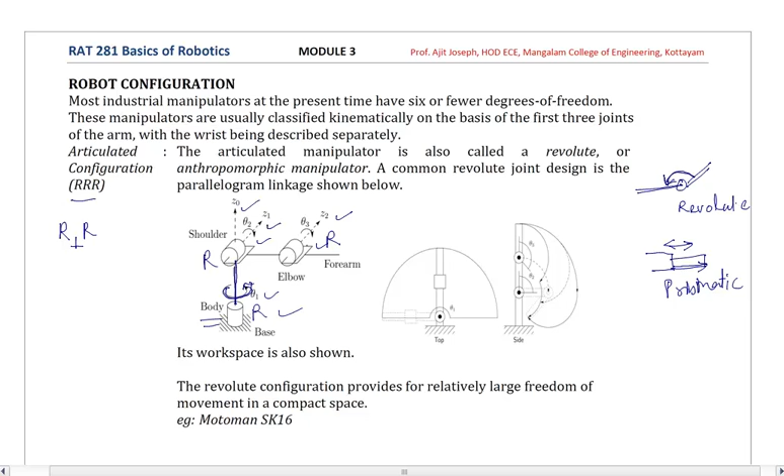And the third, if you look, the third revolute joint - let me expand this so you are able to see it much more clearly - is basically having its axis as Z2.

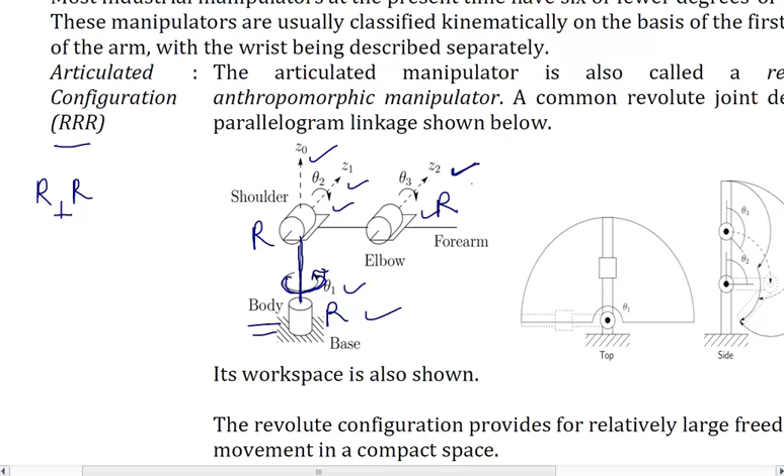Here the movement of the shaft will be in this direction for this revolute joint. The second will make it move in this direction. When this is rotating like this, the whole motor that we see here will rotate in this direction, and then this link is basically going to move up or down angularly based on the movement of this revolute joint. So that is what this diagram basically shows.

The third revolute joint is again another motor whose axis is in this direction. You can see that Z1 and Z2, the two axes of the motor, are parallel to each other. That's why it is written as R is parallel to the third R. So R perpendicular, R parallel R, or it is known as the RRR configuration.

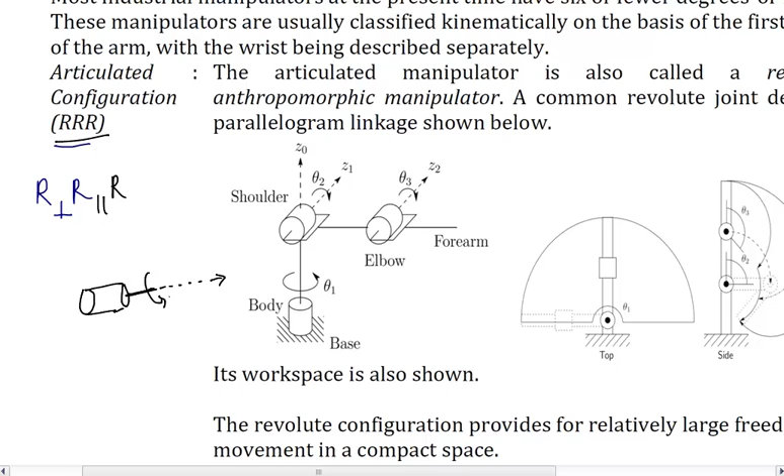So you can imagine the movement. Whenever we are having a motor like this, the shaft of the motor which rotates is basically the axis about which the rotation is taking place.

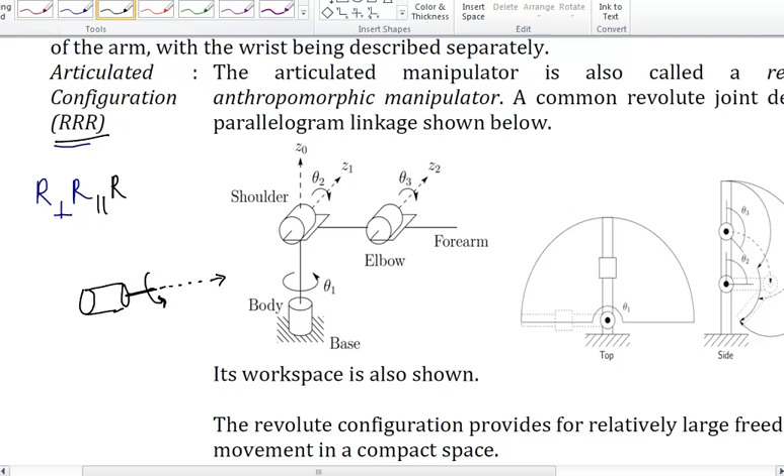I will put a video for the RRR configuration for you to understand how it looks like in real life. Anyway, the work envelope, or the area with which it can move, can be understood by looking at the top and side view. If I look from the top direction, what do I see? I basically see this image - this is the top one, and its movement is there, and we are having the work envelope around it.

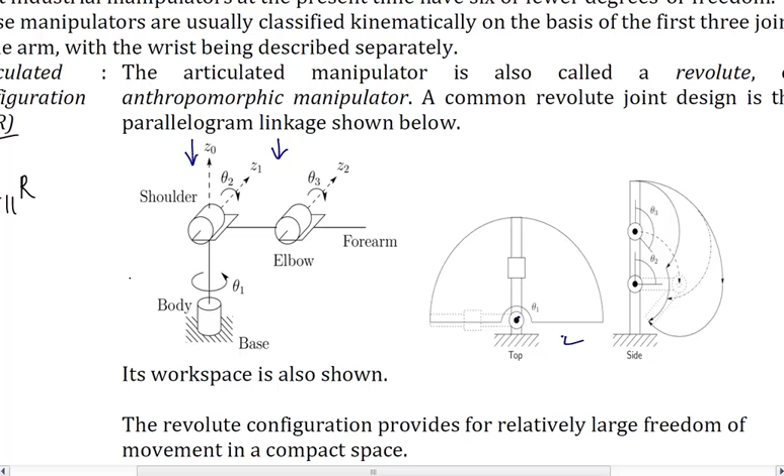So this is the articulated one, or it is also called the anthropomorphic manipulator.

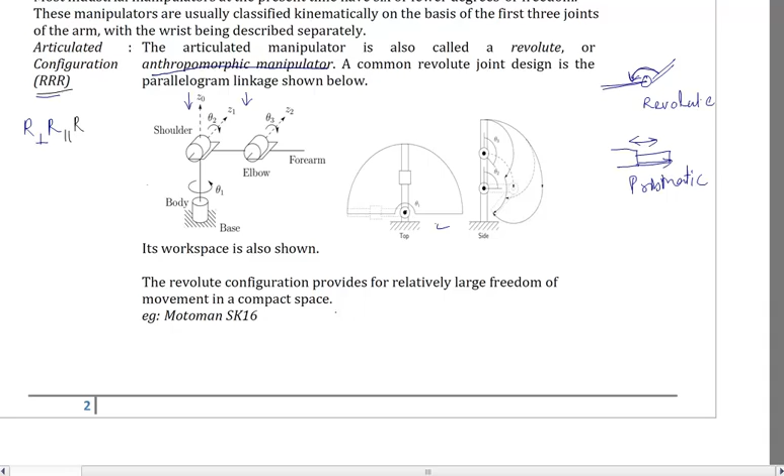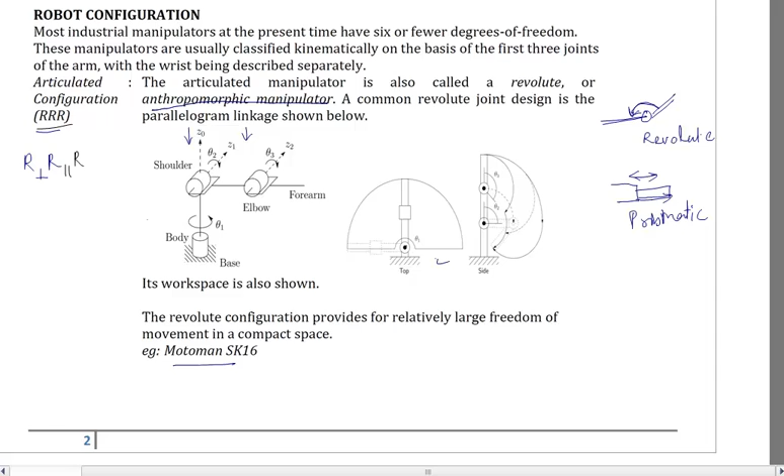Okay, and it's actually the revolute configuration for a large degree of freedom it provides. One example is the Motoman SK16, an old robotic manipulator. So this is the first articulated configuration.

The second one is a spherical configuration in which again we have three joints. The first joint is revolute, the second joint is also revolute, the third one is a prismatic joint.

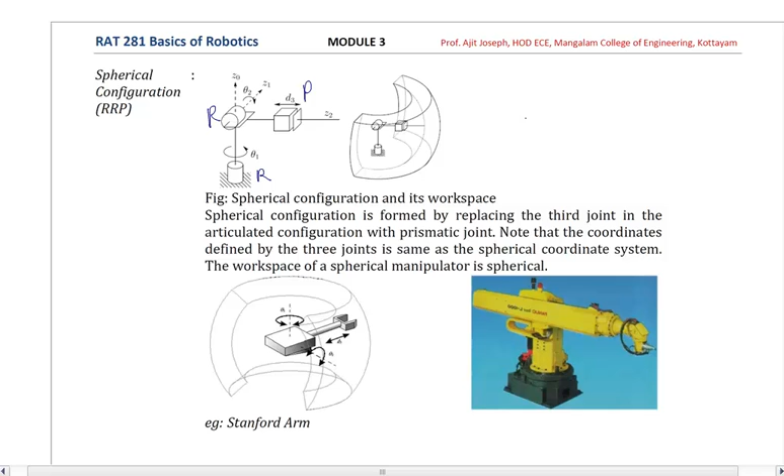See how we draw the prismatic joint. Let me expand it. The prismatic joint is drawn like this: you draw a cube, and then you draw one face of the cube as if it is moving away from the cube, and that is what is drawn here.

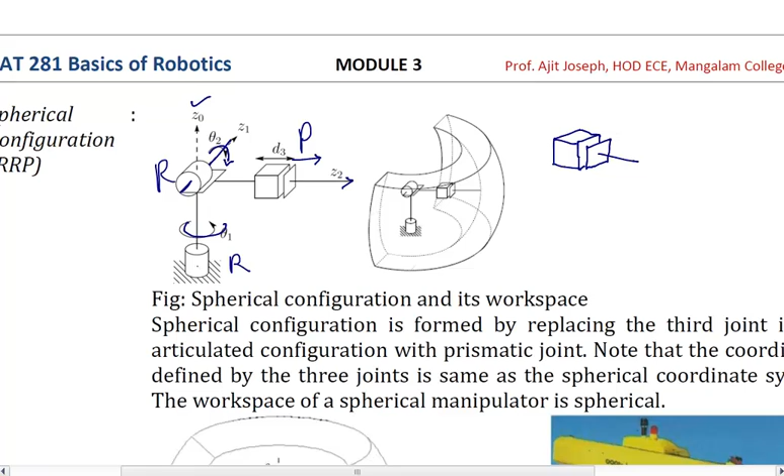So here the movement is angular movement of the shaft, which is θ1. The axis of that is Z0. The second revolute joint has a shaft like this, and the axis of that is Z1, and its movement is around in this direction. The third movement is the prismatic joint, which has movement in the d3 direction, or the axis of the prismatic is the direction in which it is moving, and that is the Z2 axis. So this is the revolute-revolute-prismatic configuration, also called the spherical configuration, or RRP configuration.

Here again you can see it is basically R perpendicular to the next R. That means Z0 and Z1 are perpendicular to each other, and Z2 is perpendicular to Z1, so it is perpendicular to P. In certain textbooks this is also the way it is done.

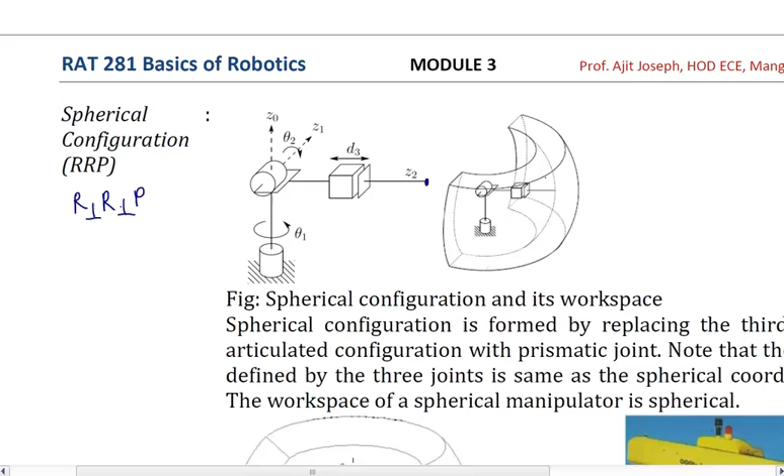Now if you try to find out what are the different areas where this end can go, that is called the work envelope. You can see that the work envelope of a spherical configuration will have this kind of shape - it's not exactly this, you can say it's a spherical configuration, they have not completely drawn it. It can move in a spherical way around it.

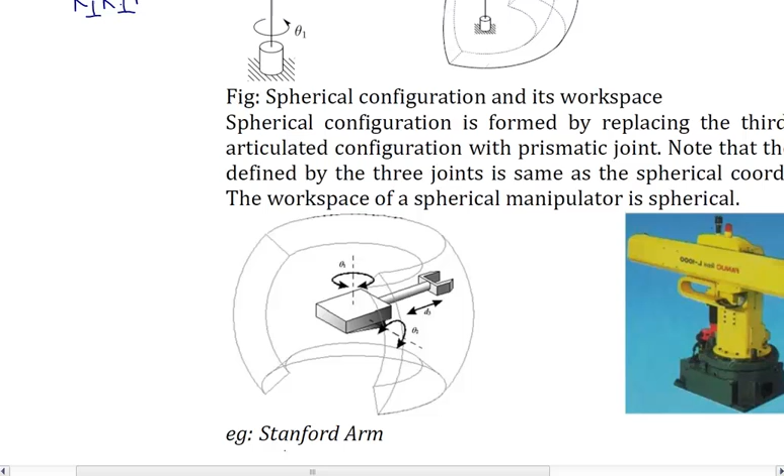Another very famous example of spherical configuration is something called the Stanford arm. The Stanford arm basically has one motor which rotates this in this direction, given by θ1. The next angular movement is given by this small movement here, which gives it angular movement, and then finally this extension will make it the prismatic movement.

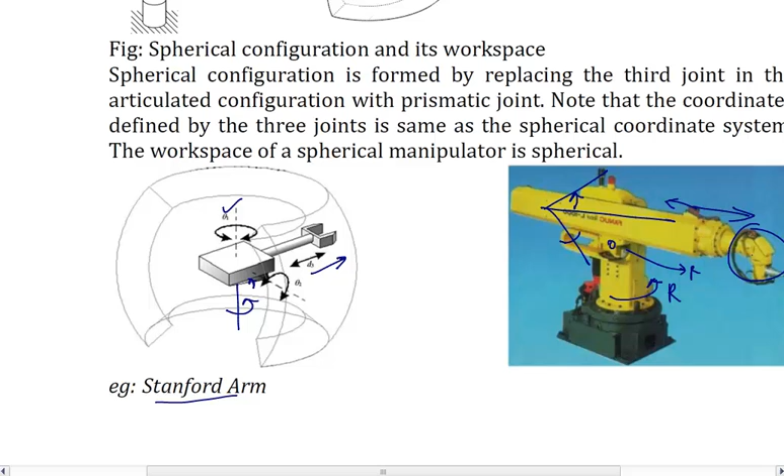And that same thing you can see here. Here this hip will move in this direction. This arm can move in an angular fashion up or down based on the joint here. So this is a revolute joint, this is the second revolute joint, and the third prismatic joint will be by moving this one front or back - the end is moved front or back. This much part might be the wrist, which I am not drawing here. We are only interested in the first three joints, so that is the spherical configuration.

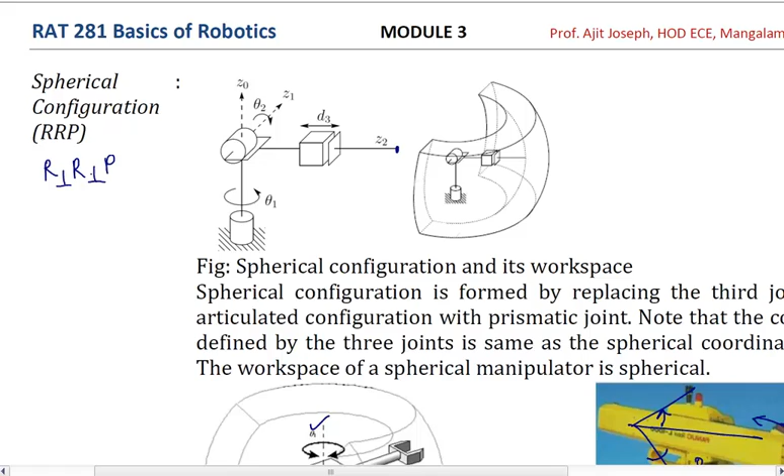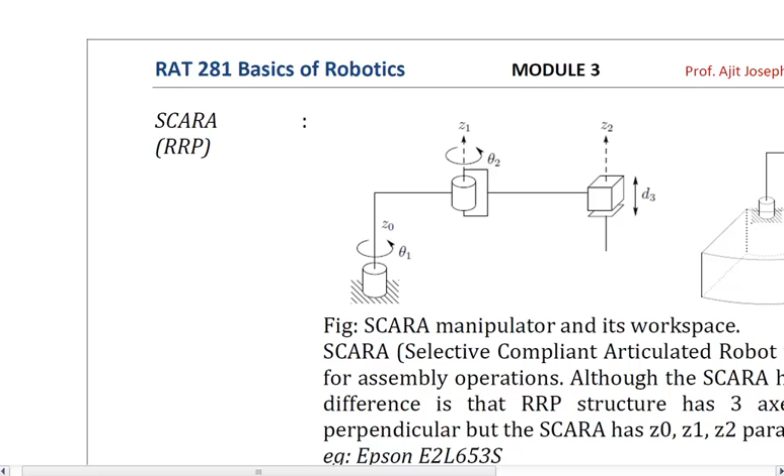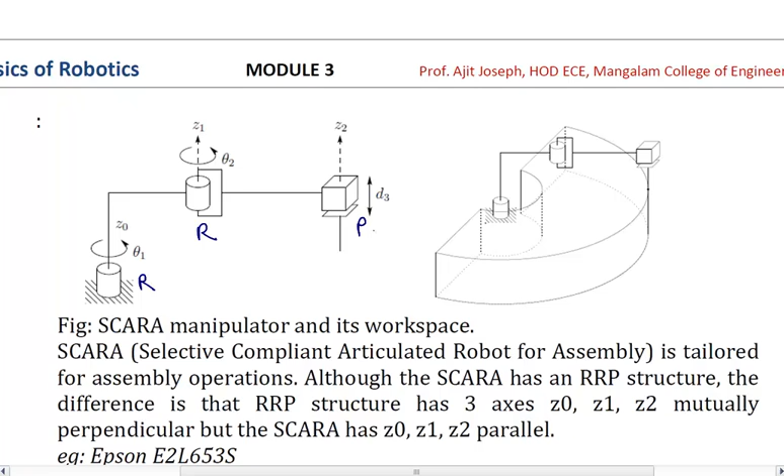So this is the spherical configuration. Next we will go for - let me zoom out - the next one, which is the SCARA manipulator. In the SCARA manipulator, again, what we find is that it also has three joints. First one is revolute, the second one is again revolute, and the third one is prismatic. So again it looks like RRP, just like the previous spherical one, but this is SCARA.

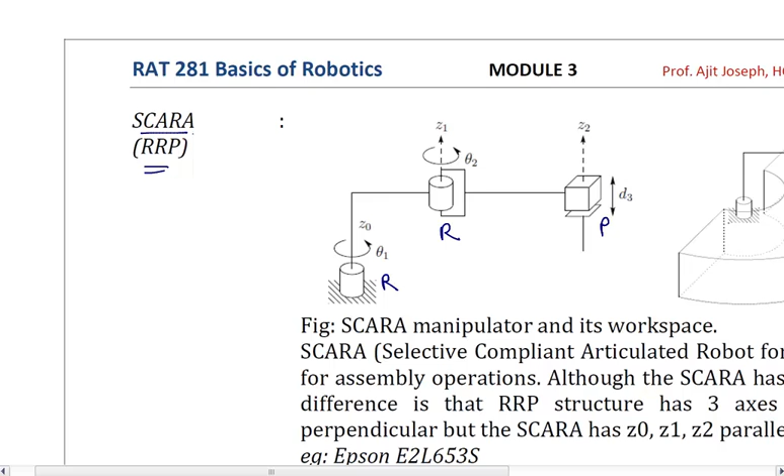SCARA basically stands for Selective Compliant Articulated Robot for Assembly. This kind of robot is basically for assembly operation. It is a very popular robotic configuration because it can do a lot of work on a tabletop.

So here the difference you find is that there is this link which has a 90-degree bend, which makes the first and the second revolute joint have a parallel axis. What is the first axis of the first joint? It is this one, this is Z0. That axis and the second axis are parallel to each other, and also the third axis of the prismatic joint is also parallel. So all these are parallel. In certain textbooks it is written as R parallel with R parallel with P.

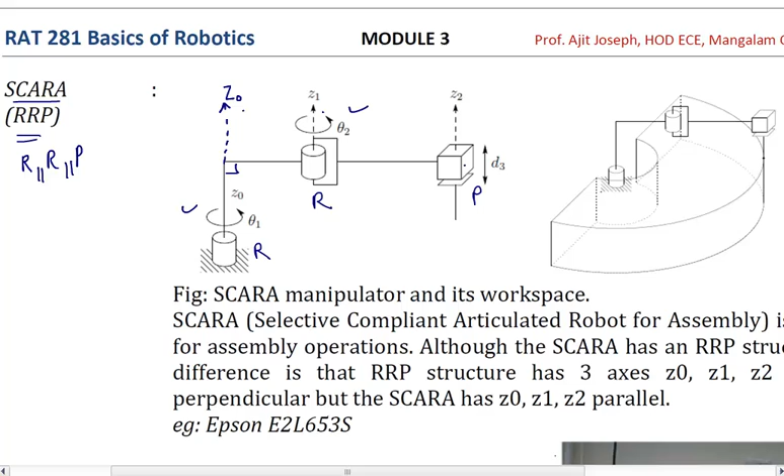And this kind of robot, if you see its work area or work envelope, with its movement it creates this kind of work volume. Whatever is inside this volume can be operated by this robot. It looks like a disc, a cylindrical disc. But what is not possible here is you cannot move this one in this direction.

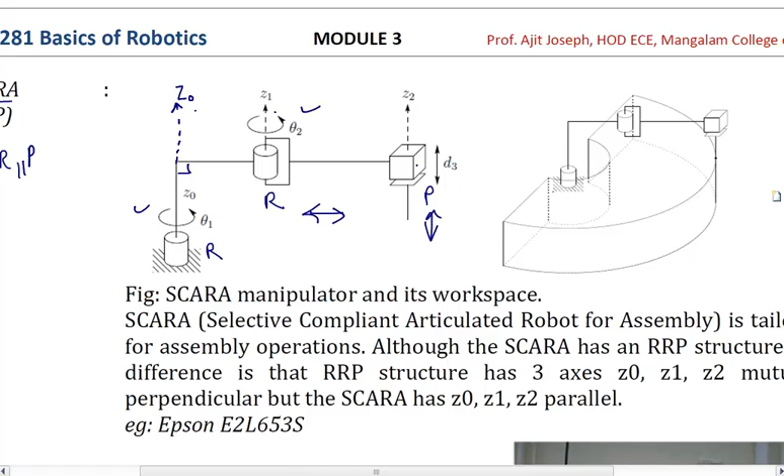You can only move it up or down, or you can have spherical rotation, and because of that we can move anywhere within this configuration. This is basically how the robot looks like: it has the first joint here, the second joint here, and the third joint again here. They have shown it as a revolute one, but that is when there is a fourth joint. For us, it only has these three joints: first, second, and third. What is shown here also has the wrist part, which we are not interested in now. This is how it looks like.

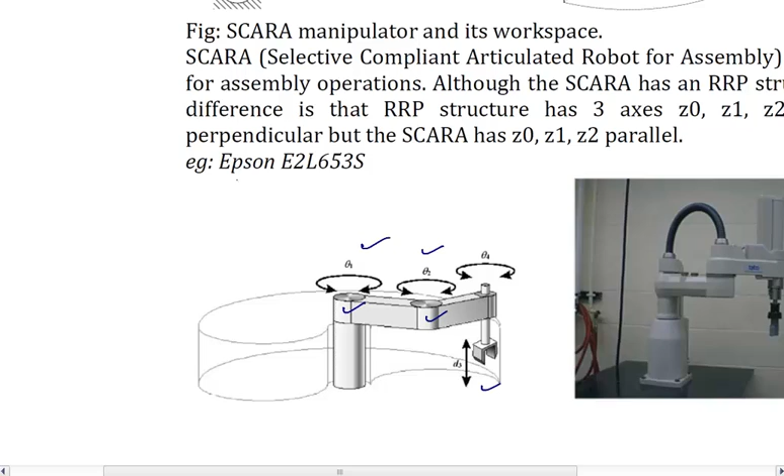One of the very famous SCARA configurations is this Epson E2L653S. That is the SCARA configuration.

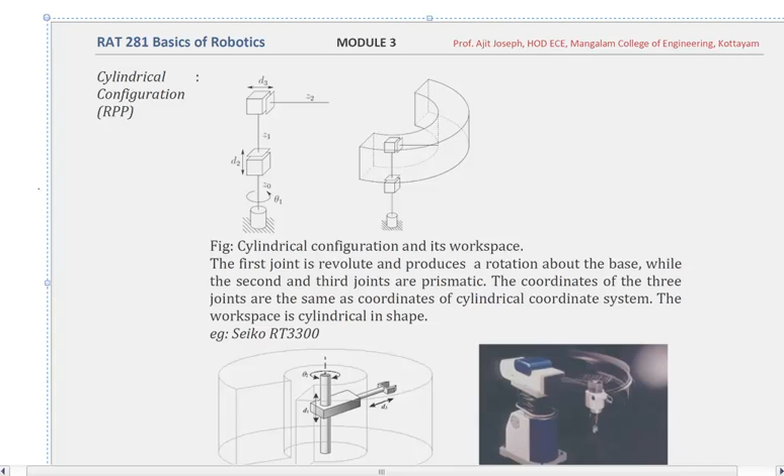Let us go to the next configuration, which is the cylindrical configuration. As you can see, let me expand it. Here you have a first revolute joint, the second is a prismatic joint, and the third is again a prismatic joint, giving it an RPP configuration, also called a cylindrical configuration. It is called cylindrical because its coordinates come as a cylindrical coordinate system, but right now I will not teach you that.

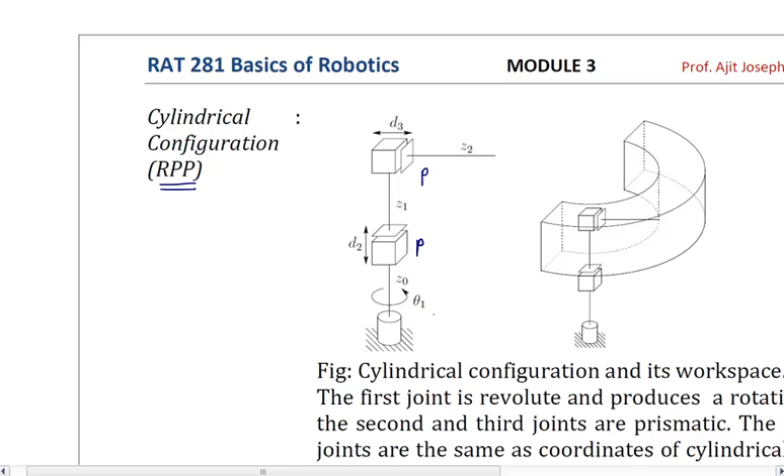The first and second joints are parallel and collinear, meaning the axis of Z0 and Z1 are on top of each other. Collinear means lying on top of each other. We have a prismatic joint here, a revolute joint here, and the axis Z0, Z1 is the same, while Z2 is perpendicular to Z1. So basically it is R parallel with P, perpendicular with P.

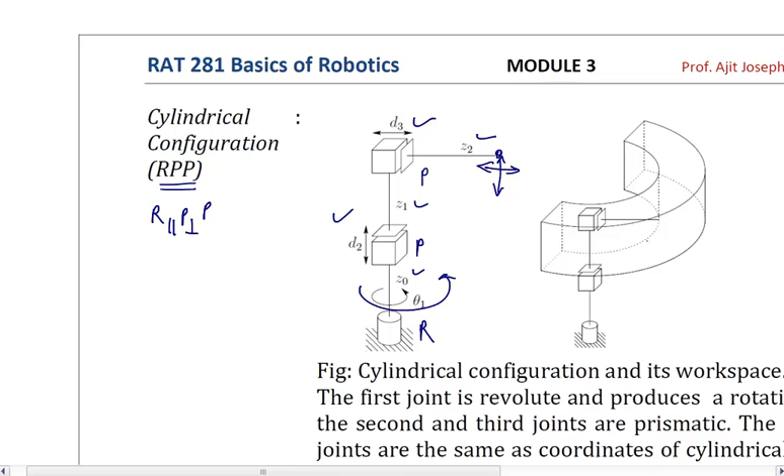With this one, this point can move up and down with this prismatic joint, front and back with this other prismatic joint, and anywhere around with this revolute joint. So it has movement up and down and anywhere around, and that's why the workspace or work envelope of this cylindrical configuration has this kind of cylindrical shape.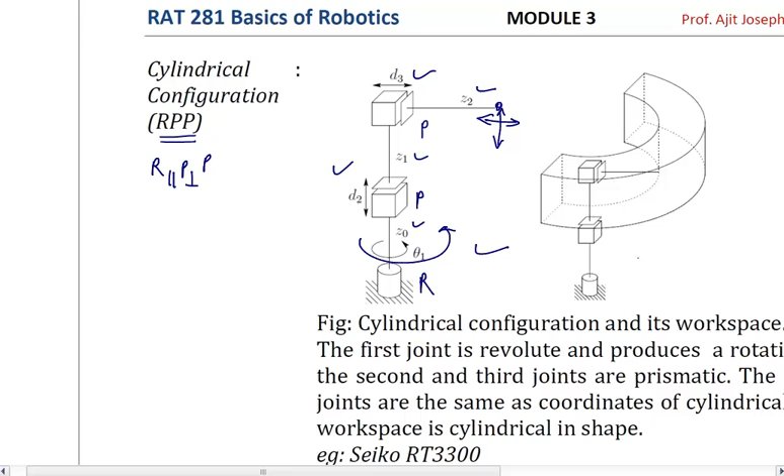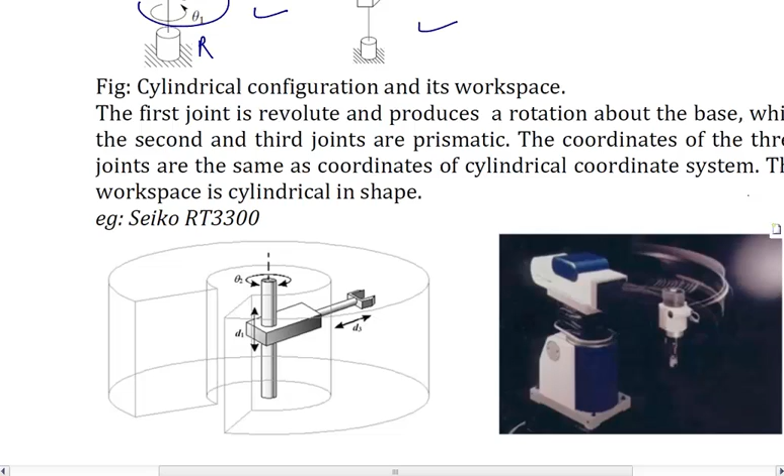For the examination, you may have to draw this one as well as the work envelope, so be careful. Another diagram which illustrates the same thing is this one, and this is one of the examples: it is a Seiko RT 3300. So this is the configuration which is called the cylindrical configuration.

The last one is the simplest one, the Cartesian configuration, which has three prismatic joints: P, prismatic, prismatic. One moves in, suppose, the x direction, the other in the y direction, and the third in the z direction. So going for an XYZ axis, these three joints move anywhere in the XYZ axis. That's why the work envelope is always a cube.

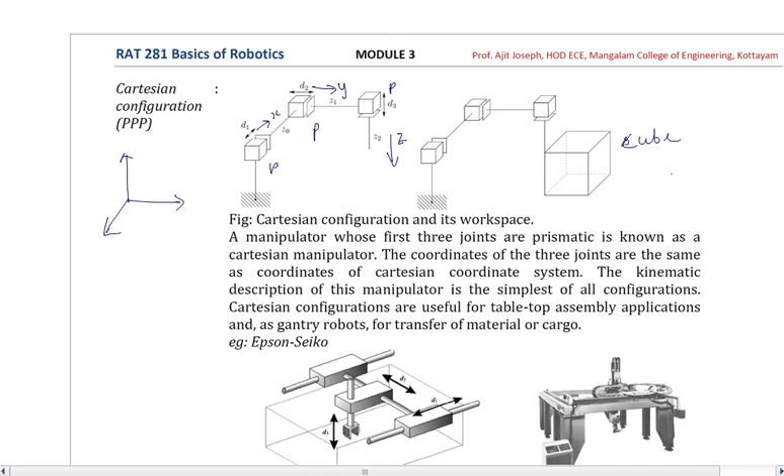This kind of Cartesian configuration is very much used for heavy weight lifting of things. This is also called a gantry robot. As you can see here, these joints basically move front and back, because of which this whole setup moves front and back, and this third joint makes the arm move up or down.

Gantry robots are mainly used in heavy equipment lifting or heavy duty lifting. You might have seen big cranes in shipyards, which move on top of rails. There are rails like this, it moves on top of these rails, and there is a hook hanging from the top, used for lifting up things. That is basically a gantry robot, and it has this Cartesian configuration, the PPP configuration.

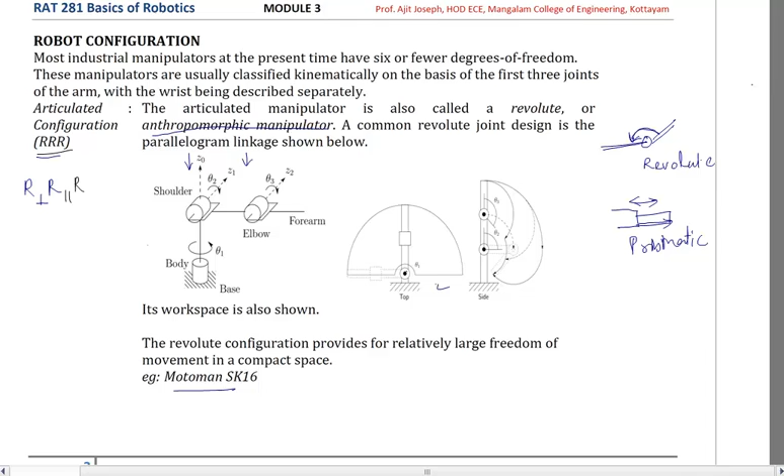So these are the 5 very important robotic configurations used for designing robots. Once again, I will take them one by one. The first was the articulated configuration, or RRR configuration. The second was the spherical configuration, or RRP configuration. The third was again RRP, but this time the SCARA configuration.

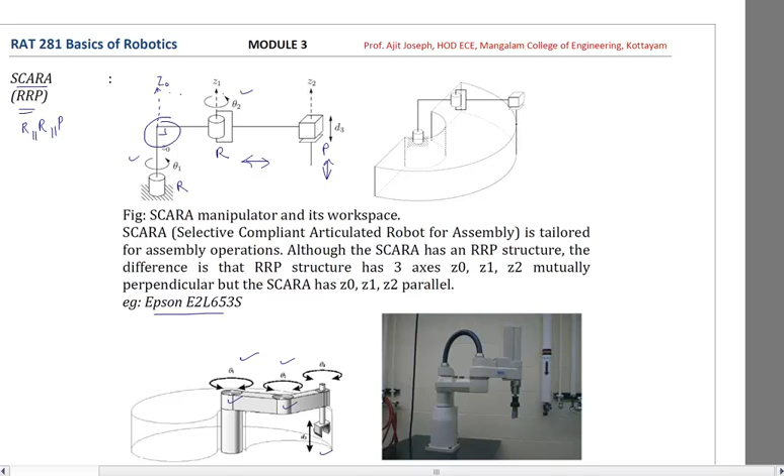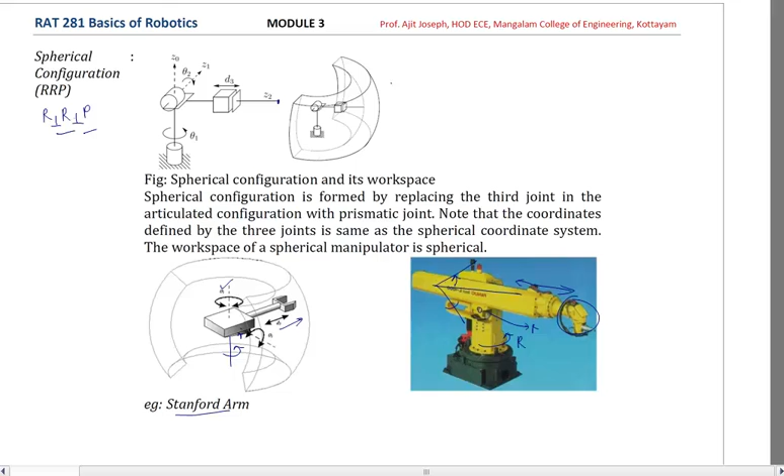The difference is this 90-degree bend brings all three parallel to each other. In the previous one, that was not the case—the three axes are perpendicular to each other, giving a totally different setup. Next is the cylindrical configuration, which had RPP configuration, and the last one was the Cartesian configuration, which was PPP configuration. In certain textbooks, PPP is also written as P perpendicular to P perpendicular to P. Thank you.